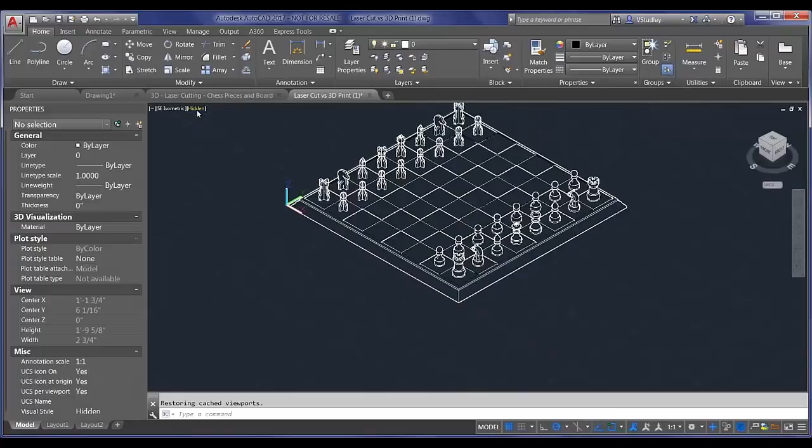So just to give you a little recap of what we've done, I'll zoom out here and show you the realistic view. Here's our 3D chess set and board. Here are all those 3D printed chess pieces, and then over here on the left now we have our laser cut chess set. I just want to show you the final product before we dive right in.

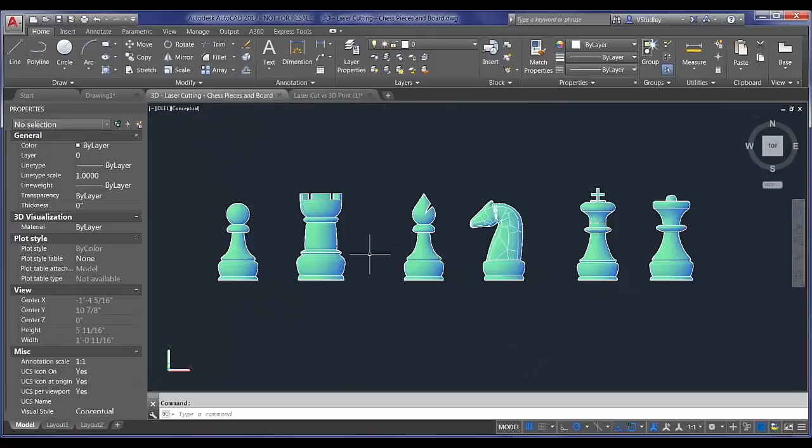Alright, back into our working file. I'm going to zoom out a little so you can see the original line work we started with at the very beginning of this journey back in May or June. Here we have the profiles of each one of our chess pieces in the set: the pawn, the rook, the bishop, the knight, the queen, and the king.

The first thing you need to know about laser cutting is that even though you're working with 2D geometry, you need to be thinking in 3D from the very beginning. We'll show you a couple areas along the way where we probably should have thought a bit farther ahead.

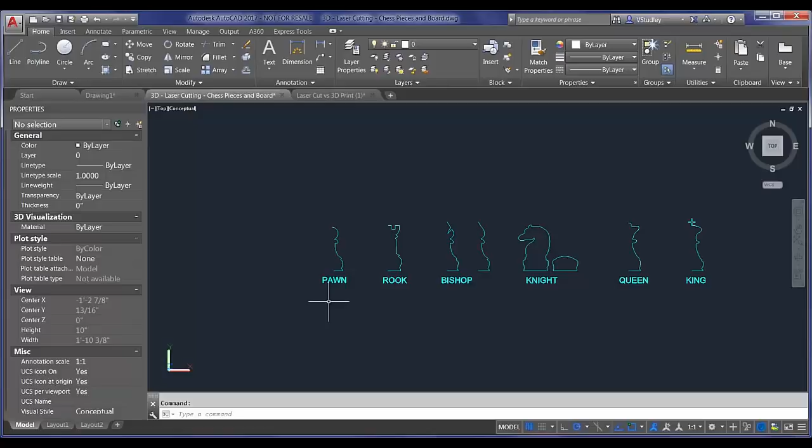That being said, I'll try to set you up for success and walk you through the process. The first thing I want to note is that the material you're printing on is important with this exercise. When designing these pieces, they're going to wedge together, and we'll cut notches into each one. So there's two pieces of wood that need to slide together in order to stand up straight on the table and create a single piece. The notches we cut into these pieces need to be the thickness of the material you're printing on.

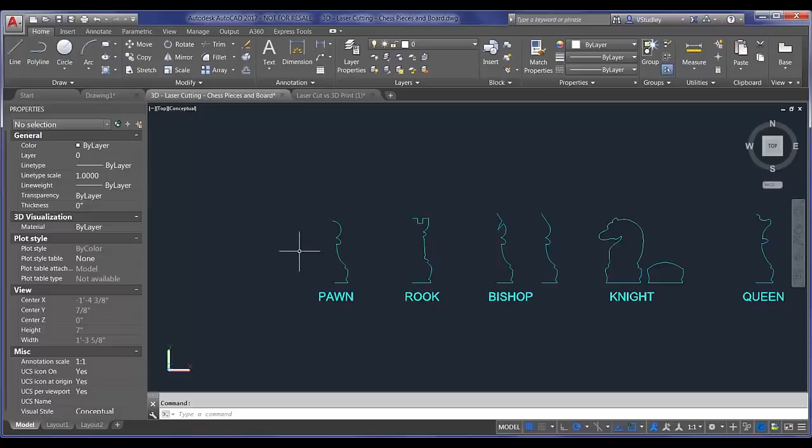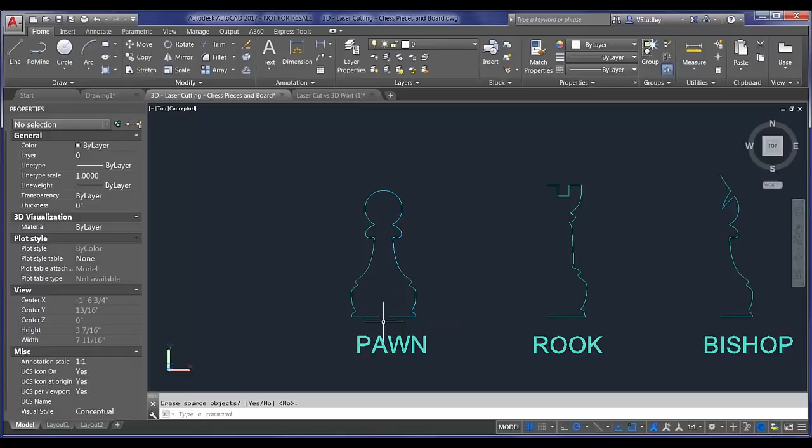Let's use the pawn as an example to start with. I have my half profile here, and the first thing I can do is use the mirror command - MI for mirror, or you can type the whole thing out if you'd prefer. Enter, grab that top point there, and mirror it here. You want to keep both sides. This seems pretty straightforward, and it looks like the right shape.

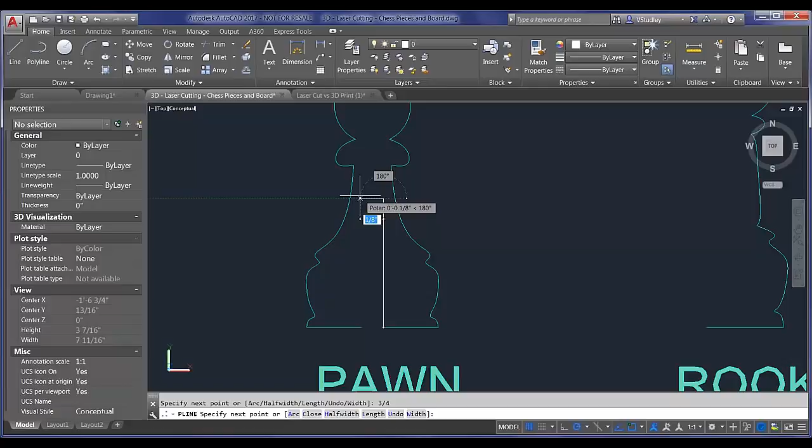I've left a little notch in the bottom to make this drawing process a little quicker - you can always trim this later. From here, I'm just going to use my PL, polyline command, start with this point, and draw up 3/4 of an inch. Then if the thickness of my material, the wood I'm printing on, is 1/8 inch thick, I'll draw that 1/8 inch notch over and then draw this back down.

Now this does not need to be a closed polyline. You probably want to keep them all on the same layer just to make sure that if you decide to use color mapping in order to print with custom print settings to your laser cutter, you can do that easily. But it's not necessary, at least not for the laser cutter we were using.

We were using an Epilog Fusion M240, just for reference. There's a whole myriad of laser cutters on the market, but that was the particular one we had available. The presentation will be tailored that way, but we tried to make this as generic as possible so you can apply it to any laser cutter.

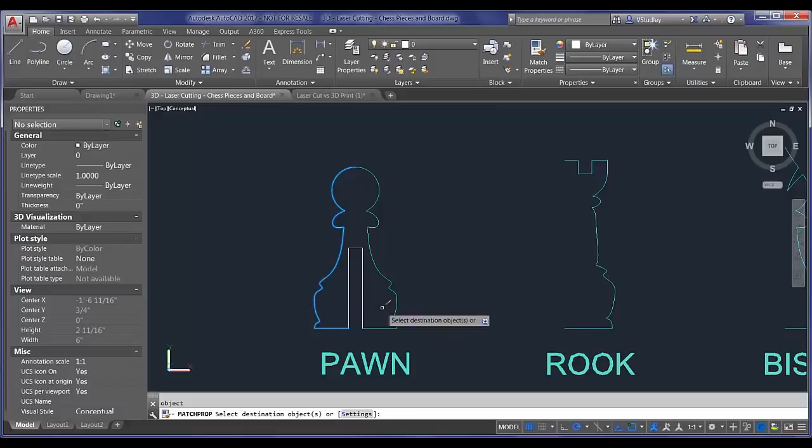From here, I'll use my match properties command, match prop, and put this on the same layer. There we go. The second thing I want to do is create that second pawn profile, so I'll use my CO, copy command, pick a base point, and drag this off to the side. Now I have two copies, but if I print out both of these, they're the same exact profile, and they won't notch together properly.

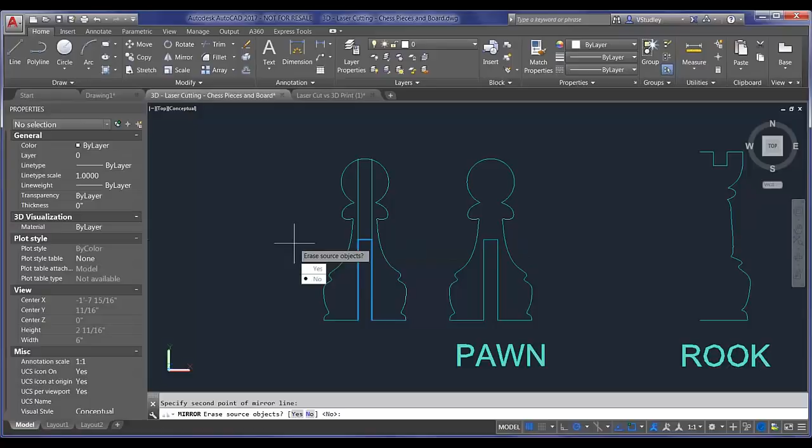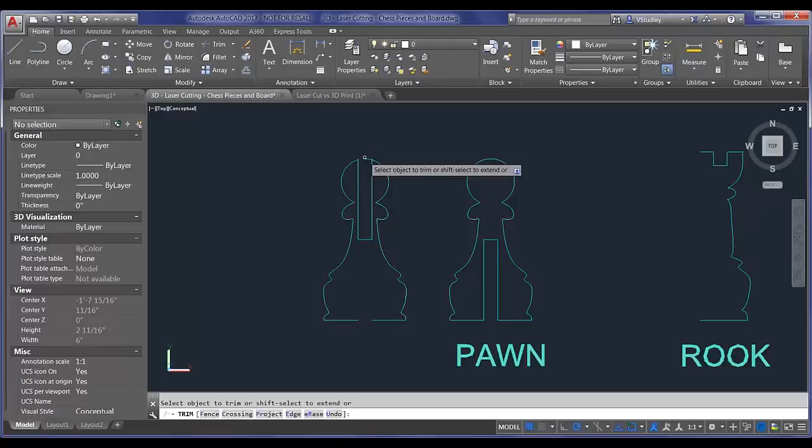So what we really want to do here is mirror this. I'll use my mirror command again and mirror this up, and this time I can choose yes, delete the source object, which mirrors that up so these two notches will line up perfectly - they'll notch together, and the pieces will sit flat together on the table. I'll use my TR, trim command, and just trim that excess geometry out of here. Let's zoom in on it for you. And then, as I said, these don't actually matter if they line up here for the laser cut - as long as it's a continuous line, it will cut it.

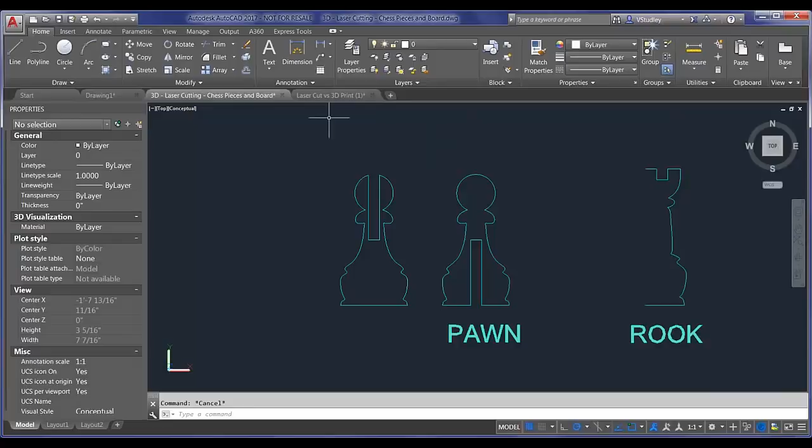All right, so now I have my two pieces, let me show you exactly what's going on here. We'll go back into our 3D model and switch into a hidden visual style. If we look at that, these two pieces are notched together, so if I move this off to the side here, you can see exactly what's going on. They slide together just like that.

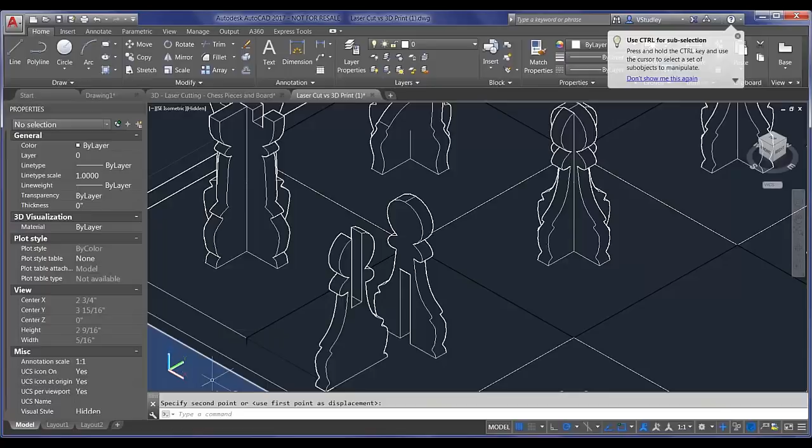For those of you who joined us for the view base presentation a few weeks ago, here's a view base done on the bishop, for example. This shows the front view and side views, a couple of isometrics, and a top view of what this piece looks like if you were to document it for production purposes.

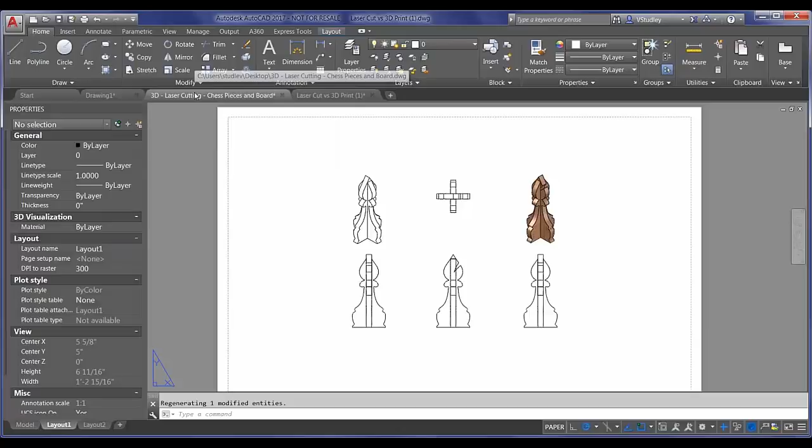We'll save these all in the box folder too, so you can download them and investigate them to your heart's desire. Okay, so now back in the file here.

This one will work about the same way. You'd mirror it, you'd add in your notch. With the bishop, let's just note a couple of differences for each of these pieces. You want to be careful of that notch in one direction, but it doesn't really matter in the secondary direction.

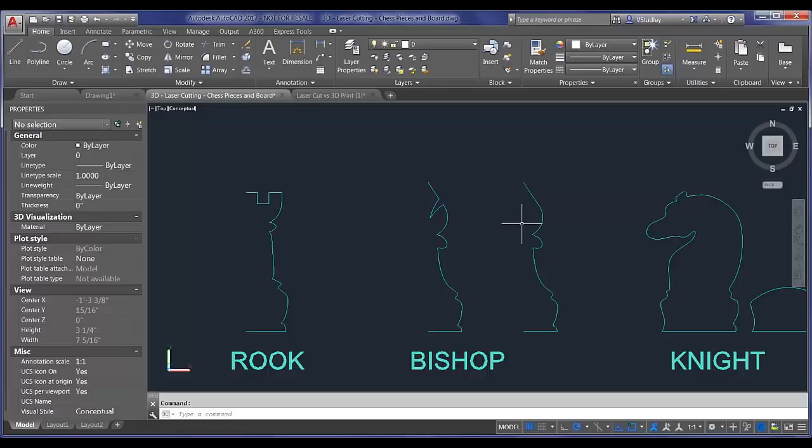So when you go to cut your notches, you probably want to cut the bottom notch on the piece with that slice cut out of it on the top, and then cut your top notch on the one that doesn't have that, so you're not interfering with your geometry. Planning ahead like that can save you a lot of pieces cut off and beheaded chess pieces.

With your knight, you really only need that horse's profile in one direction. So what I did here was cut off most of the geometry of the top of this piece and then threw an arc in here to cap it off nicely.

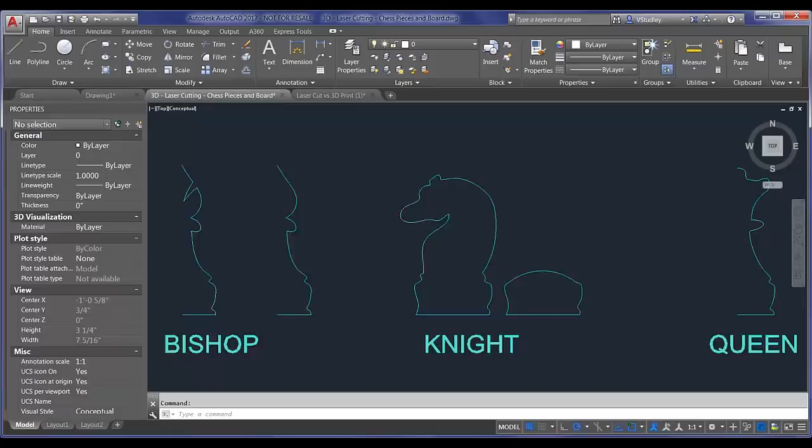The same thing with the king. Maybe you just need that cross in one direction, maybe you need it in both. It's a style choice at that point. All right, so that's about it for the profiles.

Now let's jump over here and I'll show you what that looks like. Let's zoom out for a second. There are a couple of commands that you might find handy when working with the laser cutter, and the first one is limits. If you set your limits to the extent of your print bed, it will keep you from working outside the limits of that area and overshooting the size of your laser cutter.

So limits, you can turn it on and off. I had a funny moment before the presentation where I panicked a little because I couldn't draw off to the side where I was showing you those profiles. It turned out I had my limits set on and I couldn't draw anywhere but inside that print area, which again is a great safeguard if you only want to be working in a realistically printable area.

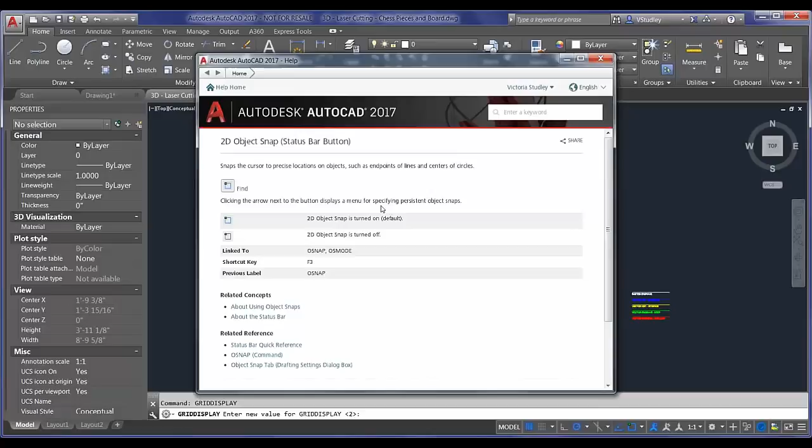The other one — and you'll notice I like this because it's a nice visual cue — your grid display command controls the display of your grid. If you set this to 2... well, there are a couple different options here. I believe you can also set this to 0. Where are we? Grid display.

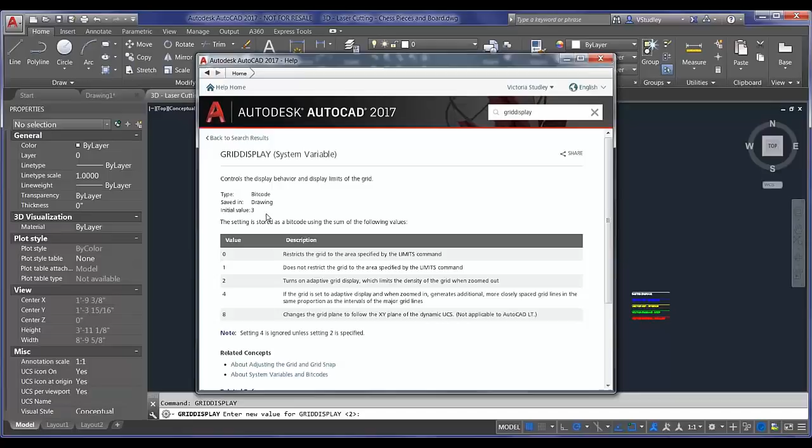I'll just show it to you right there, get that help file open. The initial value is 3, and that's going to show your grid everywhere. I usually set this to either 0, true, 2 also works, but setting it to 0 will ensure that grid area only displays within the limits that are set. I like that as a nice visual cue to tell me that I've reached the extents of the bed.

You might even turn the limits off and still have that visual cue, but then you can still draft some of your modeling off to the side and then move it onto that print bed area just with the visual cue of the grid. It's a workflow choice, but I wanted to make you guys aware of that particular system variable because it comes in handy if you're a very visual thinker.

Let's see, what else did I have here?

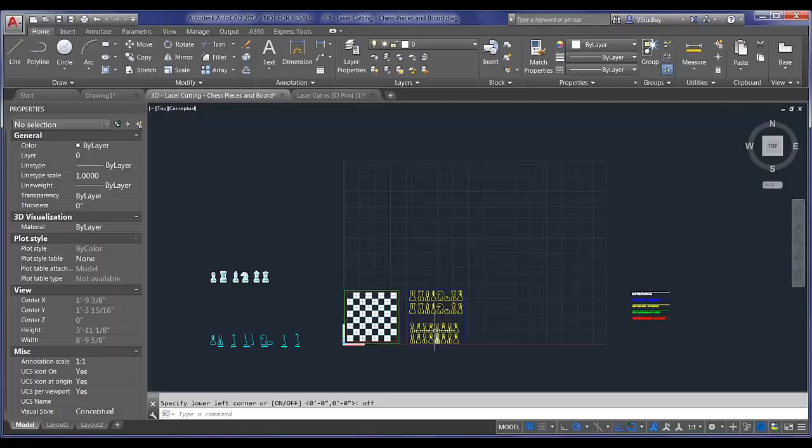So we had a 12 by 12 piece of wood, and I set this up as 9 by 9 just to be safe. I didn't want to get too close to the edge of the board.

We were playing it cautious because we hadn't used this printer before. It was actually very precise, the laser cutter, so we could have filled up this whole 12 by 12 piece of wood that we got.

But again, if you're going to err on the safe side, just set yourself some limits there. This here actually cut out a whole piece for us.

With some laser cutters you can set up an internal vector cut and an external vector cut. That makes the interior cuts first, then makes the exterior cut last to cut the whole piece out. You can set that up to do vice versa, depending on what you're printing.

For the board, we wanted to do something a little bit different. What we want to do is etch the odd squares and leave the even squares alone.

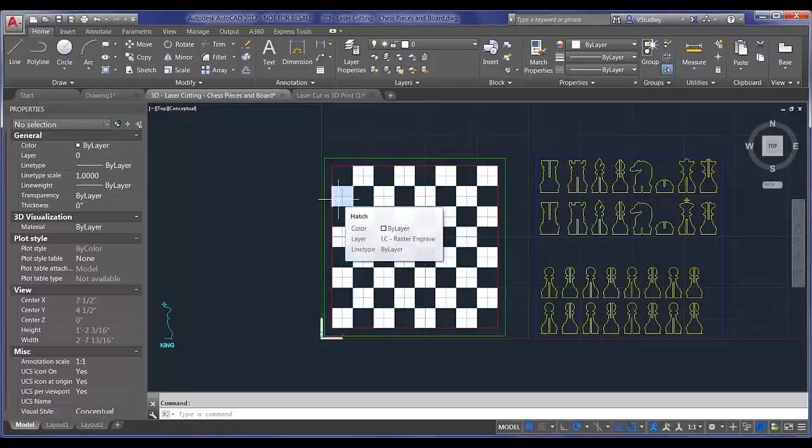So in order to do that, you can use hatch instead of vector lines. The hatch gets read as an area to be etched, not cut.

So a couple of important things to note here. Let me freeze my hatch layer first, and I'll show you how I set this up. I created these sketch lines at 1-inch intervals, just so I could add that hatch quickly by picking the internal points.

But if you leave these on and send this to the printer, the laser cutter will cut your board into 64 different little pieces. So unless you want to put your board together as a puzzle before you play, I'd recommend removing those lines, either by getting rid of them.

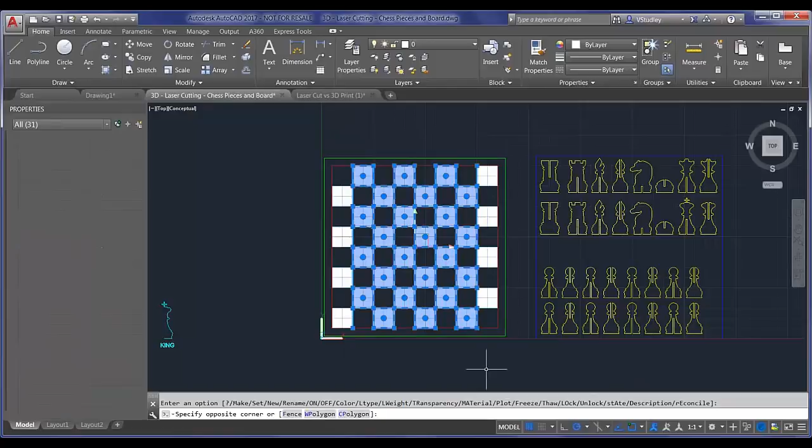You can either delete them all or put them on a frozen layer. I chose to put them on a frozen layer here, and I just called it sketch. Make sure it's not on a plotting layer before you send to the printer, or you'll be very disappointed, or you'll have a super travel kit assembly required.

The last thing we want to do here is etch the edge. So I'm going to put this hatch in. Oh, I'm going to offset actually - we'll offset 1/8 inch. What I want to do is etch the area between the squares and this other line here.

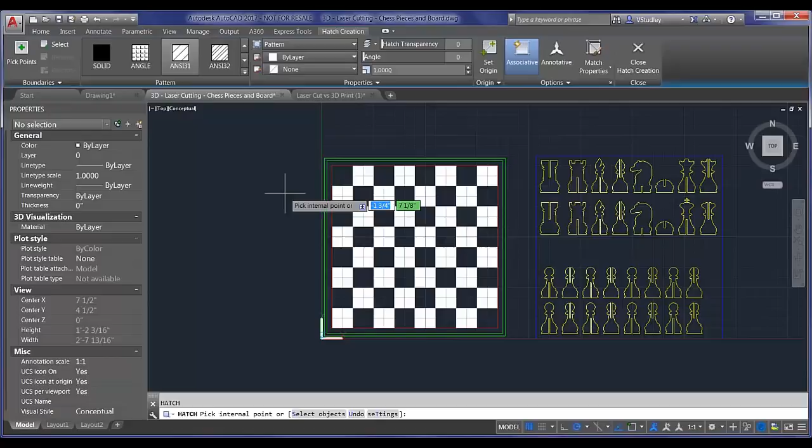So I'll use my hatch command, and I'll show you a quick trick here. I'm going to pick it, and pick my internal point, and it detected that whole boundary there.

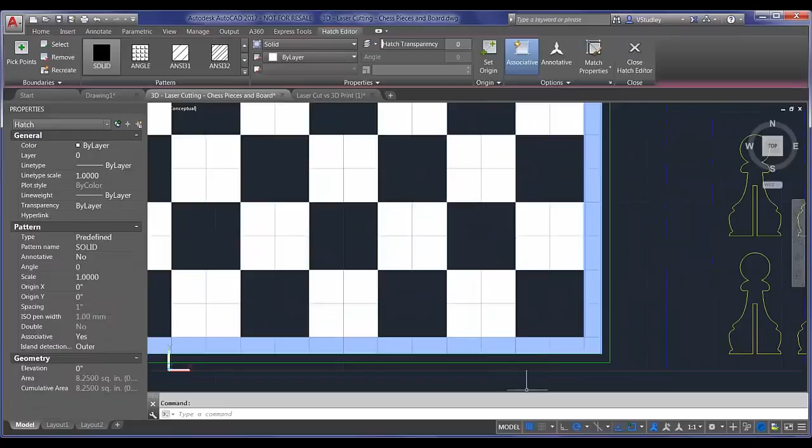Now, in order to not get this perimeter cut entirely out, what I need to do is delete those two lines. You see the two lines I have selected there, running around the perimeter of that hatch on either side. But if I delete them right now, oh, it's not going to do it for me this time, is it?

Huh, it did it last time. That's funny. Oh, I know what happened - no, I don't. Okay, sometimes you'll find that it'll fill an entire area if you delete those boundaries.

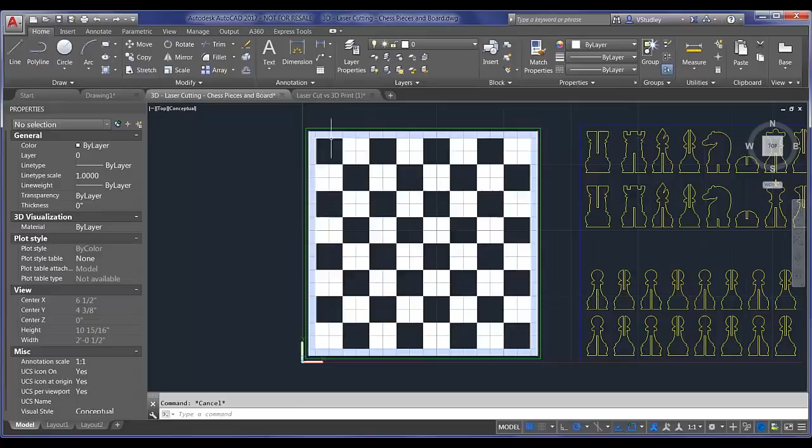So let me come back here. I'm just going to freeze my hatch for a second. So if I hatch this area in here and pick solid, and then select this, if I delete it - there we go. You'll notice that the whole area filled in.

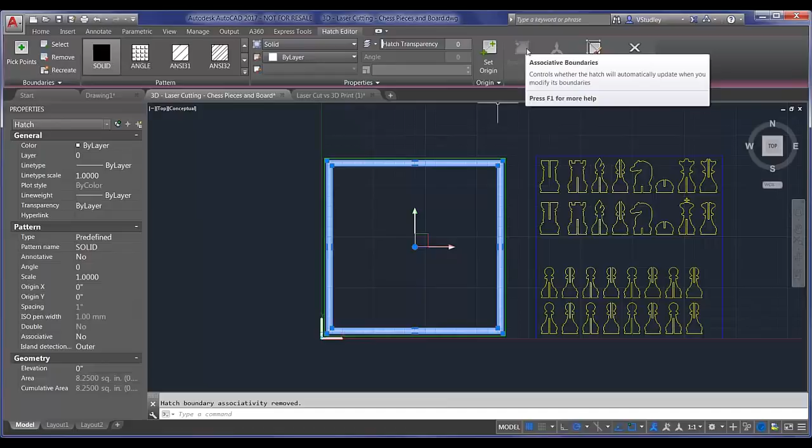And if you see this happening, what you want to do is, before you delete that boundary, make the hatch non-associative. That'll dissociate it from those boundaries and leave it as a fixed object, and then you can delete the boundary without the hatch changing on you.

Anyway, that's a cool tip or trick for hatch in general, if you don't need to change it and don't want it to keep moving on you. It's particularly helpful if you're setting things up for laser cutting and need to remove those lines, but maintain the hatch in its original design.

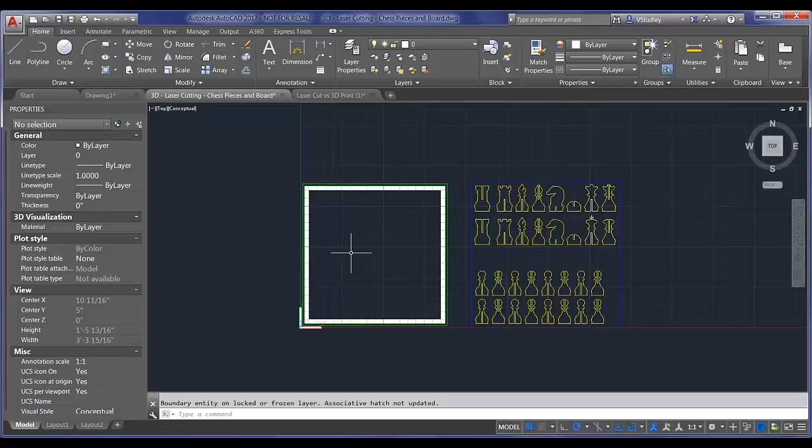So the last thing I wanted to note here was the color setups. I gave a quick visual cue as an example of what you could do for color mapping, so you might engrave a raster image. If you attach a raster image, like our profile photos from the beginning of the presentation, to an AutoCAD drawing, you can print that out. The image frame is detected as a vector cut, so it'll actually cut right around the image. If you're having trouble with it, you can draw another rectangle right around the image in line work just to make sure it cuts, though it may cut twice - we had mixed results with that. But you can assign different settings to different colors and really customize exactly what's happening on the printer side.

So with that said, I think I'm going to turn you over to Alex, and he's going to talk about the actual plot settings.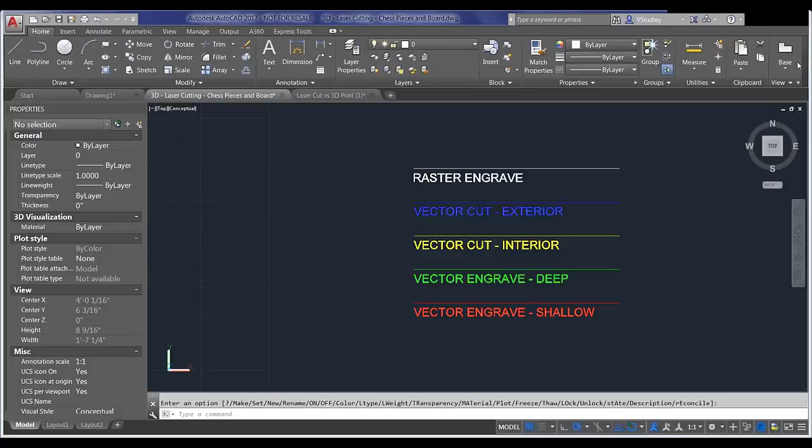Awesome. All right, so once we've gone through and designed our model, or in this case the chess pieces and the chessboard, and we're getting ready to send this over to the laser cutter, doing so is very, very similar to printing to just a regular plotter, with some minor differences.

Depending on the type of machine you have access to, there's probably going to be proprietary software included with that laser cutter that needs to be installed, which we would access through the PC3 file in AutoCAD. We're not going to go through this in great detail, but essentially you would go through the plotter manager command, access the add a plotter wizard, and go through the process of creating a PC3 file unique to the laser cutter you're accessing.

In our case, we were using the Epilog engraver. I want to apologize - we are bouncing back into PowerPoint because we're not presenting this from downstairs directly next to the Epilog. There's just way too much noise, a lot of projects going on, so we're actually doing this via PowerPoint presentation.

From the screen, you can see we have identified the Epilog PC3 file. To access its proprietary software, you would go into the properties, to the right of the PC3 file name, and from there go to the custom settings. In our case, once we've done that, we gain access to the Epilog print properties.

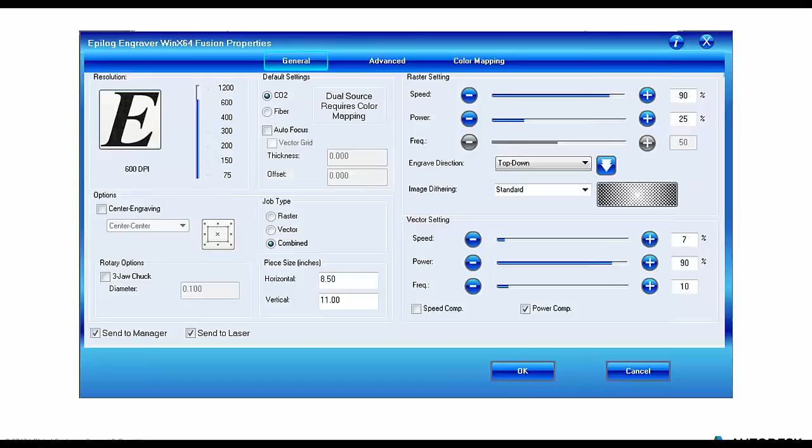And the power comp essentially drops the power down, which is good if you're doing a lot of curvature work. So if it's very detailed and not very linear type cuts that we're doing - we're curving in our material - we can drop the power of the laser down so that we get a nice clean cut.

So that was the general tab. If you notice at the top, we've cycled over into the advanced tab. I'm going to just glaze over this - it's really for rubber stamp work. There's a bit more involved when creating those rubber stamps, but in our example we're not using that, so we'll skip over it.

The last tab is color mapping, and we can use this if we want to get really fancy in our AutoCAD designs. As Victoria mentioned, we can assign different colors in CAD to have different types of cuts or engraves in the Epilog laser cutter.

Here everything is controlled similarly to how we'd control it in CAD. We have our red, green, blue primary colors that are the same numbers we'd assign in CAD, so we can be very specific with the color combinations we're assigning, and have that represented with speed, power, and frequency here in the Epilog, gaining a lot of control over what we're cutting or engraving.

We can make things deeper cuts based on color, or shallower, and a whole lot of flexibility can be applied to our design through the color mapping. So once we've figured out everything in terms of speed, power, frequency, and color mapping, we'd click OK out of this, and come back to our familiar CAD environment.

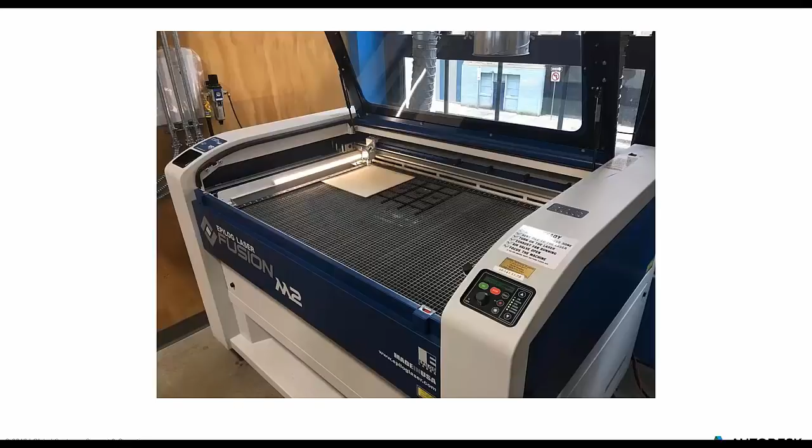So we're getting closer to actually doing some laser cutting and engraving. Once we hit OK in AutoCAD, we essentially send all of that information over to our Epilog.

This is a picture of the actual tool we have downstairs in the build space here in Boston. You can see we have a pretty decent size bed on which we can do our work.

One thing I want to note, which did throw us for a loop the first couple of tests, was that our cutting board is located way up in the upper left corner, but CAD isn't oriented the same way. CAD thinks 0,0 is in the bottom left, but in the Epilog world, 0,0 is in the upper left. So we had to make sure we were orienting ourselves in the right position.

One thing we found was we were doing a lot of testing. As we were learning this for the first time and getting comfortable using it and setting the parameters, we were going through a lot of material. That was actually a great thing about using the laser cutter and its flexibility with different materials.

One of the Build Space guys downstairs said, hey, you don't need to be using all of your material, just use a piece of cardboard. So we grabbed a piece of cardboard, a relatively inexpensive material, and did all of our testing on that, which was fantastic. The time we were sinking into testing and wasting material was done on something inexpensive rather than the actual high quality wood we had purchased.

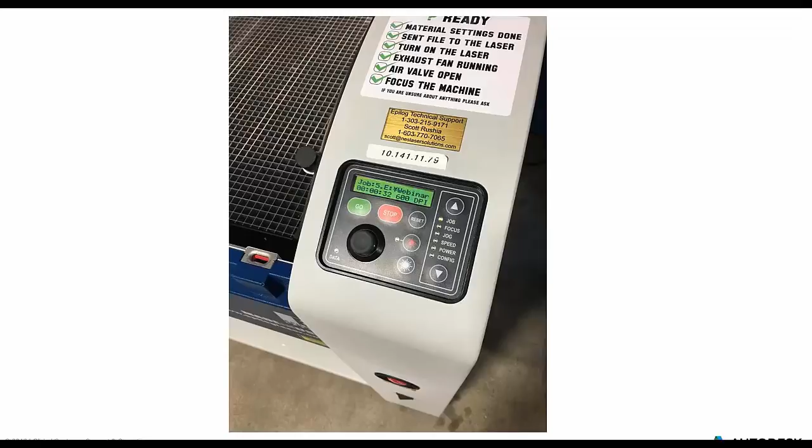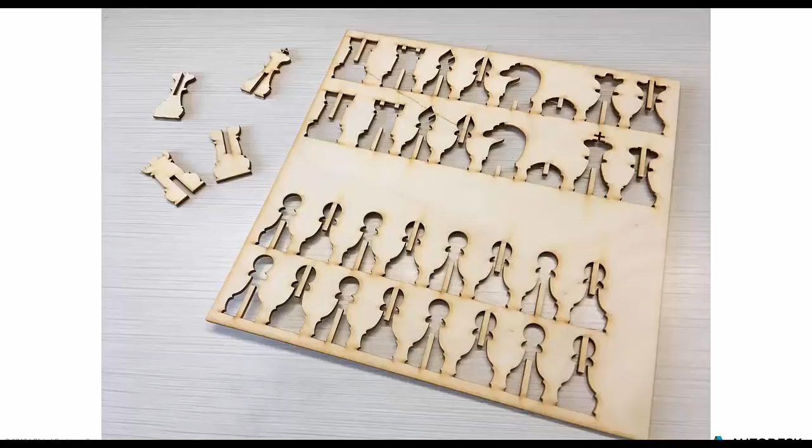This is the end result. This is our chess pieces on the board that we cut them out of. You can see we have all of the cutout pieces, and they're essentially reciprocal on the board itself. You can see it's very, very clean. The level of detail was remarkable, and you can really see that in the cross of the king piece.

We were a little concerned, like, geez, is this thing too small? Is it going to break off? We really were kind of nervous. But the resolution capabilities of the laser cutter was fabulous. There were some things we did note though - you will see some staining of the wood. It did get pretty hot, so maybe we could have played around a little more with the power and frequency settings. But there were some interesting results for our first cut here.

Yeah, and that's interesting too - we used either a laminated board or some kind of composite, and the glue from it actually made the edges sticky, and that went away with time, but it also contributed to the residue on the board. I think if we used a solid wood instead of a laminate, it would have come out a bit differently depending on which material you're using.

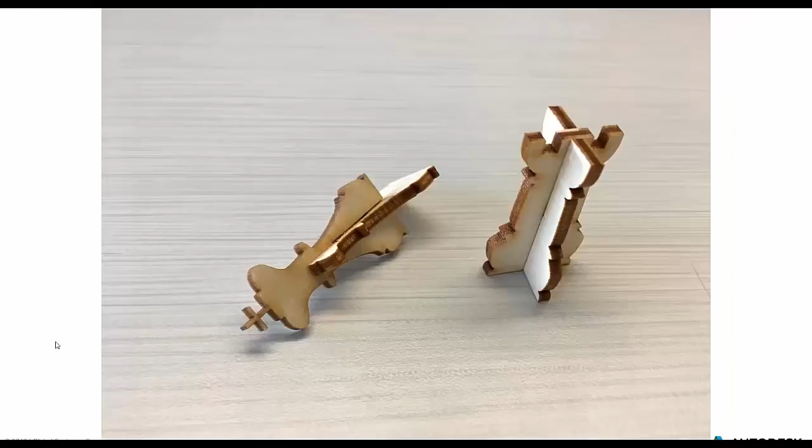But here we go, here's a close-up of our success—we got this eventually to work. Here we have a couple of our pieces, and the king on the side, you can see how they slide into each other, and once slid into its fullest extent, they stand up and they're pretty solid.

And the cool thing is we still have the reciprocal of these cutouts on our board. So say you wanted a travel chess piece, you could just disassemble all these, fit them back in the board, and off you go. We thought it was a pretty cool concept.

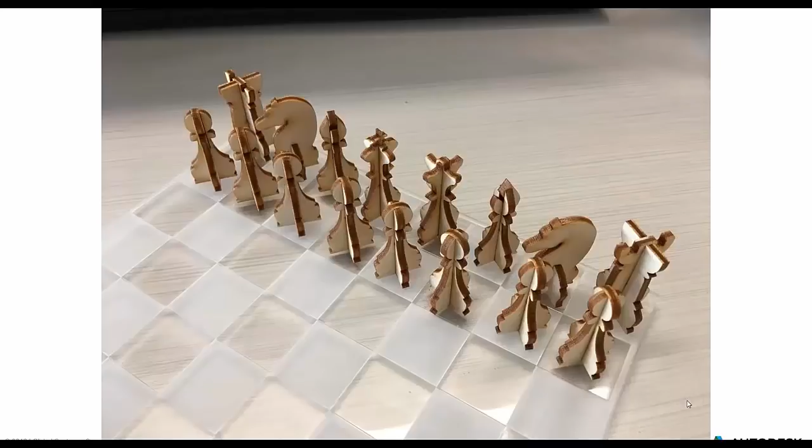Here we have all of our wood chess pieces assembled on our acrylic board, and you can see how the hatches we assigned to the white squares are scored, giving it that kind of white frosted effect, whereas the black squares, or essentially the empty squares we had in CAD, are untouched and completely transparent.

We just got a comment saying apparently we are right in time for the World Championships for chess in New York City. That's pretty cool—I had no idea, that's awesome. Or maybe it was by design. No, very lucky, very cool too.